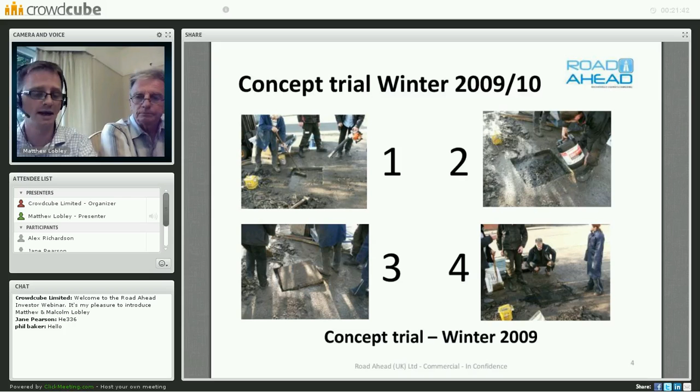So we're absolutely convinced that this is a working solution. And once these blocks are in, there is no way they are going anywhere.

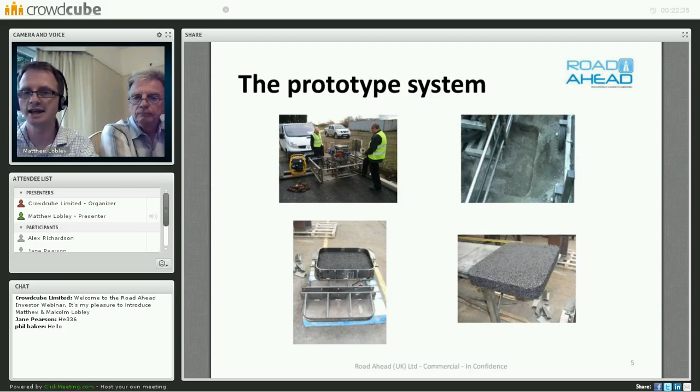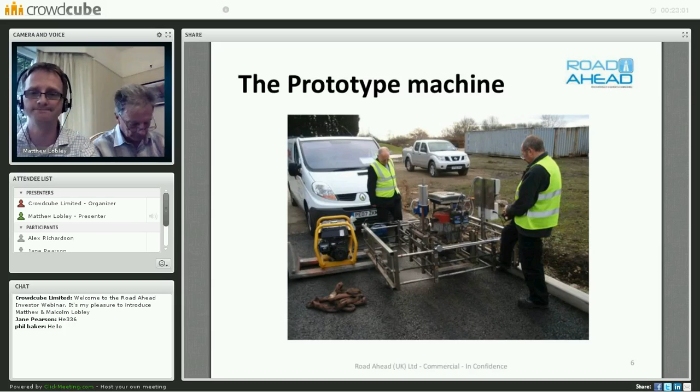This is a more close-up picture of the machine in action with some of our guys there. As I say, this machine is not like the machine that we will be rolling out to customers. This was a test bed that we were using, that we could make adjustments to all the different variables, speed of cutter, advance rate, such like, so that we could work out how the final system would operate. On to the next slide.

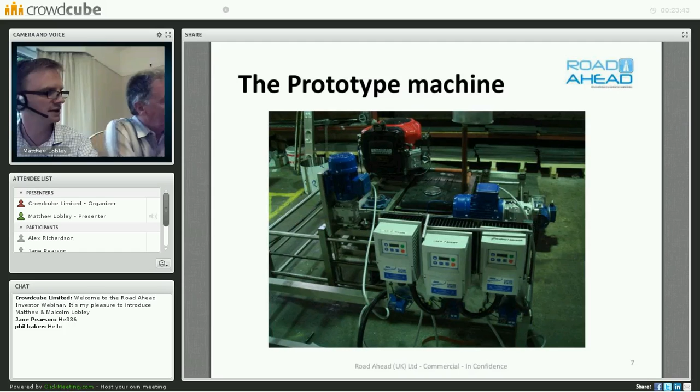It's an outer frame with an inner frame in it. The inner frame contains a petrol engine, and the cutting head puts at 400 revolutions per minute when it's geared down, with a heavy flywheel to dampen vibration. And then we've got the inverters for the electric motors to move the central pod within the frame and the XYZ motions.

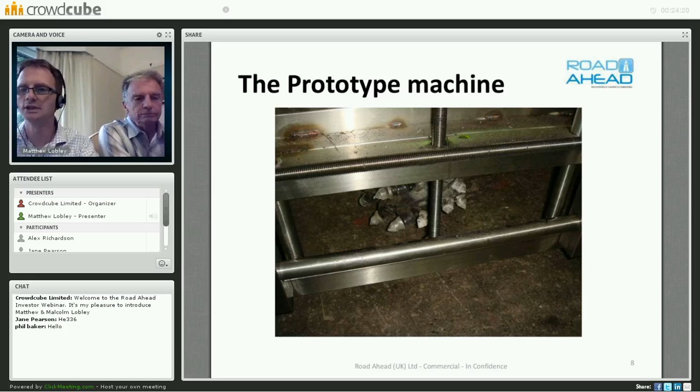The next slide is a picture of our cutting head. We worked with a company called Bingham International, who are world leaders in road planing systems. This is the first type of cutting head they've done, which is intended to mill and drill. This is actually a real innovation, something which has not been tried before. So this is part of the patent application we have in place. So moving on to the next slide.

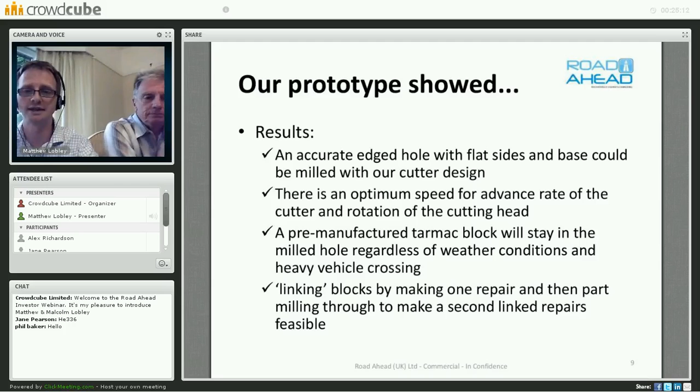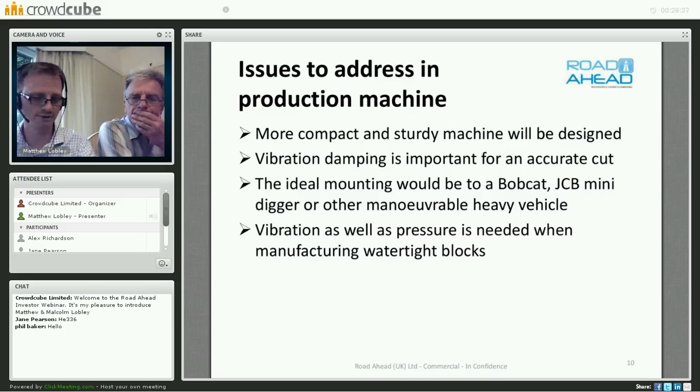So, what do our customers want? They want to get away from repeatedly repairing the same potholes. Employees and managers in highways departments are under pressure from politics to make sure that money isn't wasted, and an awful lot of money is currently wasted doing short-term quick fixes in order to prevent the council from getting sued, which they then have to repair often several times and then go back and do a very expensive repair on using a cutting saw and hot rolled asphalt. Very slow, very expensive process.

So they want something which is fast, near permanent, and which is cheap. And from the councils we've spoken to, they don't believe that there's anything on the market which currently fits the bill for that, which is why we've had such enthusiasm from the council we've been consulting with about our solution.

They're interested in innovation, they tell us, but if I'm being honest, they're also very keen on familiar materials. They understand tarmac, they know skid resistance, they know the safety properties, they know it will wear at a similar rate to the surrounding material in the road. This is not some fancy wonder material that's going to have to go through some transport research laboratory testing. This is something they completely understand, and so it provides a real level of reassurance for them.

They want a wieldy system. I was asked by somebody earlier on actually what wieldy is; a not unwieldy system, maybe I should have said, which is compatible with existing vehicles. So something which can be either lifted off the back of one of those existing trucks, or if it's a bobcat, it can be driven off the back of the trailer, towed around by one of the existing vehicles.

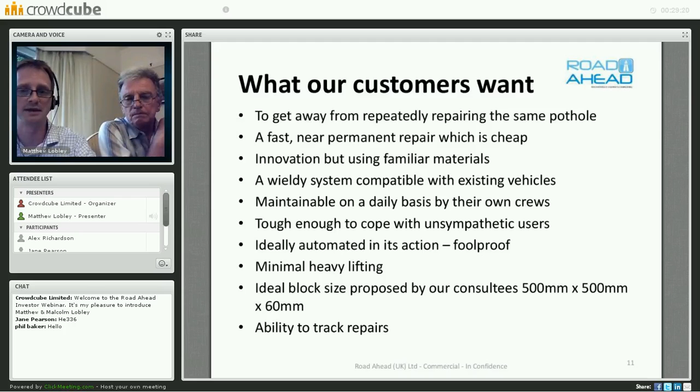We're also keen on the ability to track and record repairs. So our system incorporates a system which was developed with a company called Masternaut, and they helped us to be able to scan our materials so we can prove that customers are using our materials, track the repairs using GPS and provide them with an independent report to prevent them getting sued by vexatious claimants. So they were most enthusiastic about that.

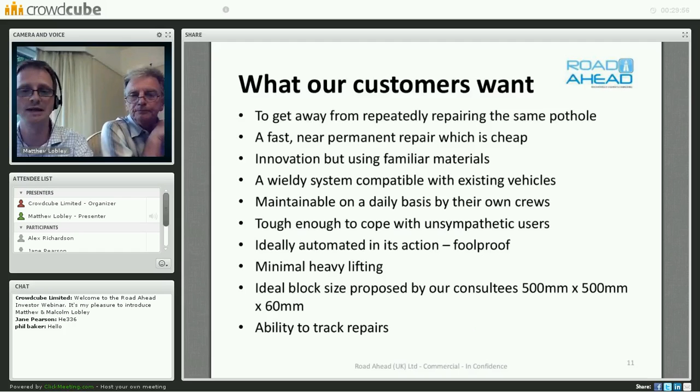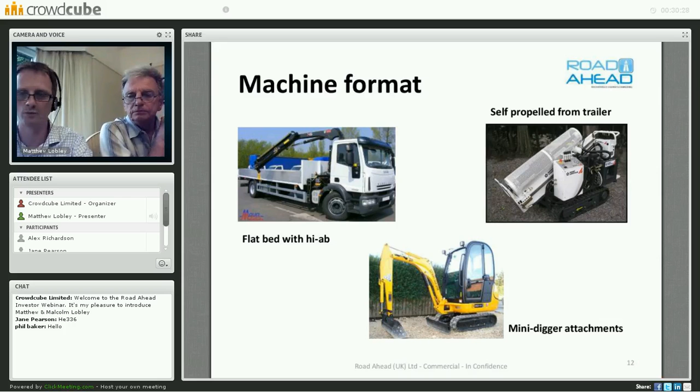So just a couple of pictures to finish off before we go to the Q&A session. Typical sorts of vehicles that you might see used by a highways maintenance authority. So flatbed truck with a HIAB arm, which, as I said, could be used to hold the machine down if that's the customer's solution. Self-propelled machine, we won't be working on this just now, but it's definitely an opportunity for the future. Mini digger with attachment on the end, driven by the hydraulics, which will require some development.

So our machine would not be dissimilar in terms of the surrounding packaging, the way it works, but with our innovative milling and drilling head and XYZ axis movements on there. So this is not beyond the realms of possibility. This is engineering which can be adapted, can be achieved, and can be made reliable. So that finishes our presentation.

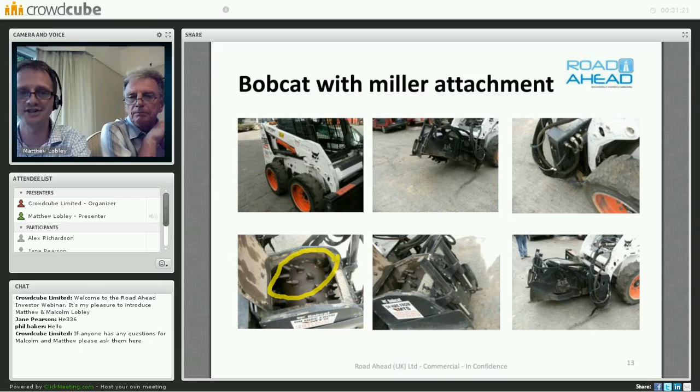I'm sorry it's always a bit of a quick rush through with these things, but then we'll move on to questions. So if anyone has any questions, please do let us know. We will try and respond as quickly as we can to them.

Yeah, somebody typing.